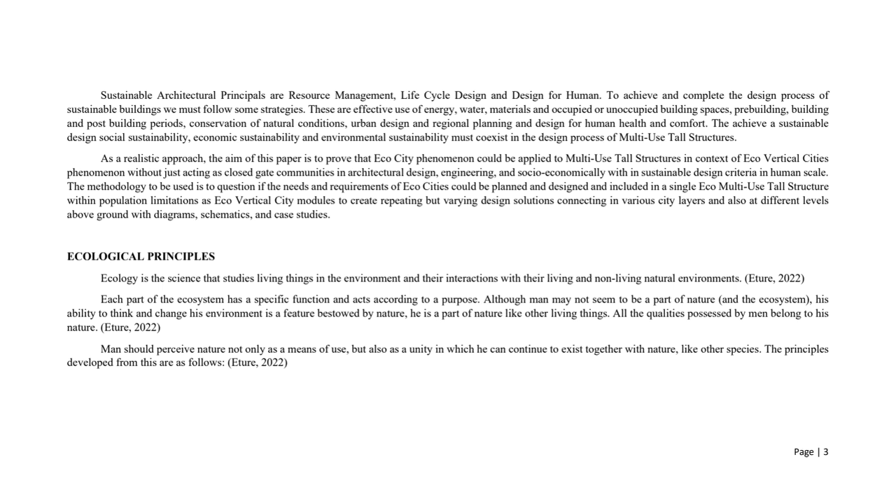Firstly, rehabilitation of the environment by making green belts in rural and urban areas and giving importance to progress in the agricultural field. Second would be adaptation to the biological environment by environmentally compatible development plans and constructions compatible with climatic conditions. The third would be balanced development, buildings with low energy consumption and preservation of existing ecological features.

The fourth would be stopping the spread over large areas by optimum use of urban areas, establishment of effective transportation networks, and limitation of urban sprawl. The fifth would be energy saving by sun, natural ventilation, and lighting or insulation, reducing energy consumption with a design suitable for climatic conditions.

The sixth would be obviously affordability. The seventh would be healthy conditions by reducing pollution and improving the environment, and recycling of waste, recycling and reusing. The eighth would be society, participation of the community in management and development.

The ninth would be ensuring social equality, equal rights for all, equal living conditions. The 10th principle should be respect for history by restoration of existing historical buildings and landmarks, and recognizing cultural diversity. The 11th would be enrichment of the cultural space. The 12th would be improvement of the biosphere.

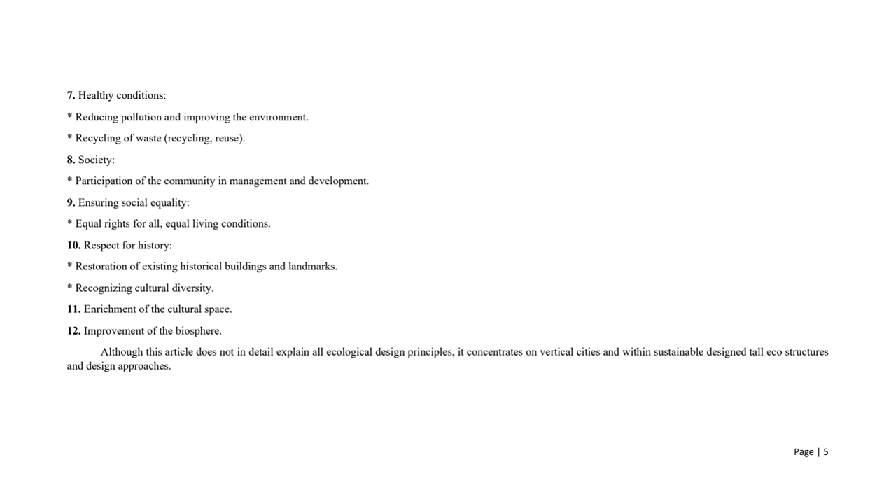When we look at vertical eco-cities and eco structures, the idea behind designing ideal cities goes back to the end of the 19th and beginning of the 20th century, due to the adverse effects of industrialization and the industrial revolution, and also increasing population and pollution. Two main studies come forward based on this idealization approach of cities: Howard's and Corbusier's. However, their approaches mostly contradict each other, although they have some common ground at some points.

The garden city phenomenon of Howard, that we can see in figures 1 and 2, was to spread the population to clusters of smaller cities of not more than 30,000 population, with agricultural and forest areas around a city-centered model in a circular orientation from center to outward. The city center would include green space belts, cultural, social, and governmental functions. The forest and agricultural areas would be the most outer cluster. Then inward, a smaller cluster of cities with residential and industrial areas, and then the main city center.

This model of ideal city planning was also based on the term of zoning of modern urban and city planning approach. The garden city model of Howard was an expansionist approach, with smaller population clusters of small cities around the city center, thus more land use, infrastructure, and transportation.

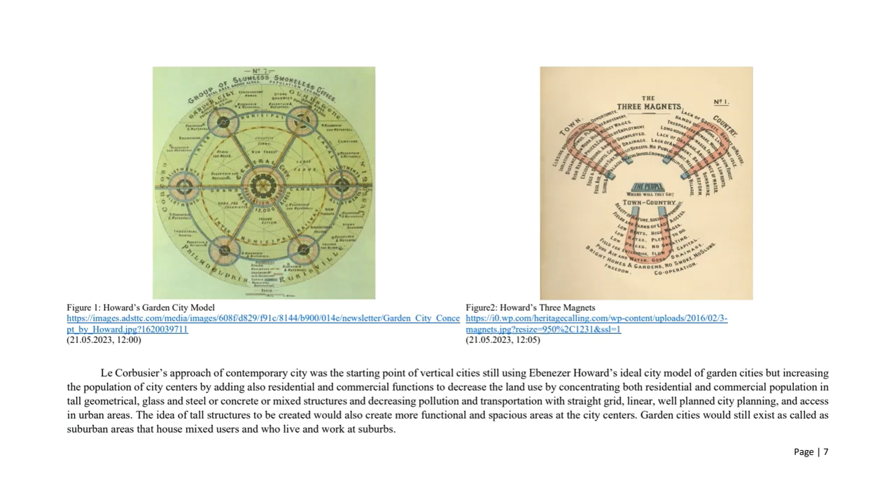The idea of those structures to be created would also create more functional and spacious areas at city centers. Garden cities would still exist, called the suburban areas that house mixed users who live and work at the suburbs. Those structures would have common amenities at the ground and some on the roof of the structures to increase sunlight access. Some examples of amenities could be kindergartens, social areas, and pools, etc. Between the blocks, more common green space and park usage would be available for all inhabitants.

With the Radiant City that we see in figure 3, which we can also call the Shining City, proposing a functional transportation network, large green spaces and living spaces with lots of sunlight, the project proposes both a new standard of living and a new, better society.

In addition, with Radiant City, 'emerged out of nothing' reflects just as in John Locke's proposition about tabula rasa, which means a blank plate. In the area designated for the construction of the project, there is nothing but the remains of destroyed vernacular European cities.

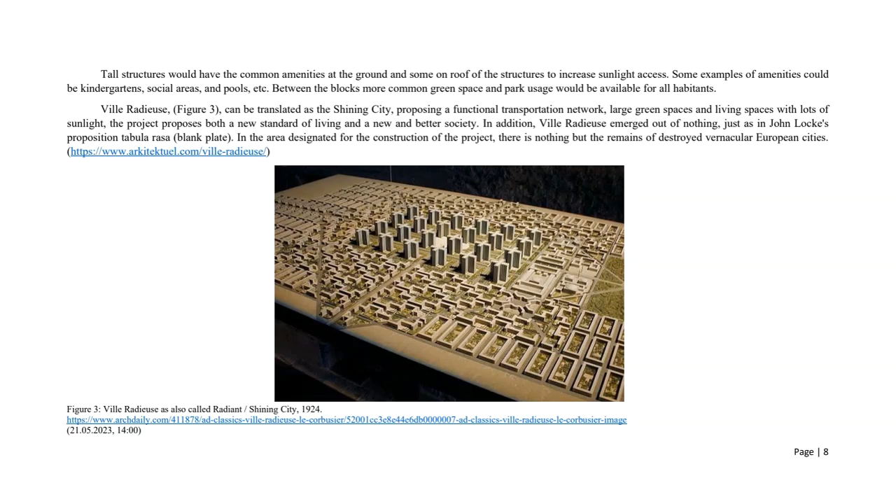Tabula rasa, blank slate, is the theory that individuals are born without built-in mental content, and therefore all knowledge comes from experience or perception. Epistemological proponents of tabula rasa disagree with the doctrine of innatism, which holds that the mind is born already in possession of certain knowledge. Proponents of tabula rasa theory also favor the nurture side of the nature versus nurture debate when it comes to aspects of one's personality, social and emotional behavior, knowledge, and sapience.

John Locke, a British philosopher, argues against the idea that everything is innate, based on his tabula rasa view. According to Locke, there is no innate knowledge, and humans acquire all their knowledge throughout their lifespan from feelings and experience.

Utopian architecture and utopian cities are highly debated even today. What was once considered a utopian approach is turning into fact today through every level of design. The existence and subjectivity of utopias make it impossible to build actual utopian cities, but adopting the idea brings it closer to reality.

Ville Radieuse is also a project that has been heavily criticized as a utopian city. Although Corbusier had thought about every important point and subject such as healthy living, traffic, sound, public space, and transportation, there were many points that Corbusier skipped, and because of this the approach was named a failure.

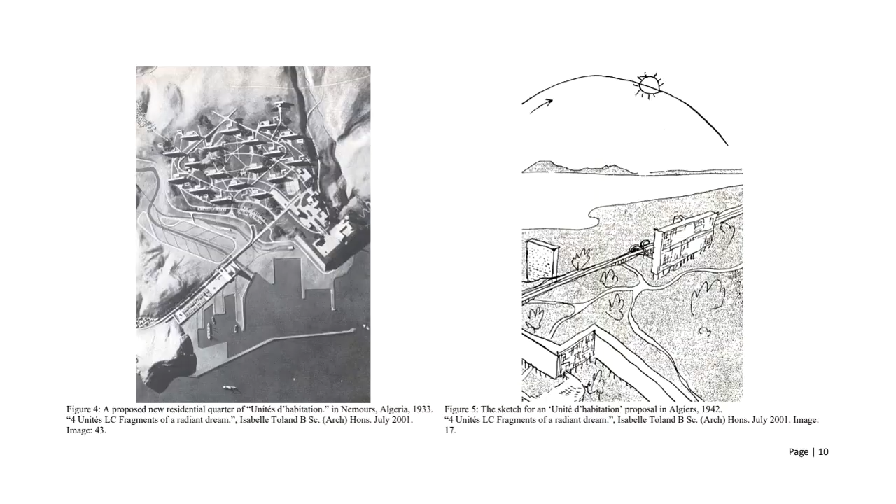Unité d'Habitation in Marseille, France, takes the form of a housing bar 135 meters long, 24 meters wide, 56 meters high, and mounted on stilts.

330 apartments divided into 23 different types can accommodate a population of between 1,500 and 1,700 occupants, having at their disposal on the 7th and 8th floors a shopping street and a hotel restaurant, together with a kindergarten and sports facilities on the roof terrace.

The constructive principle adopted, the so-called bottle rack, consists of building apartments inside an independent frame of posts and reinforced concrete beams. The apartments are made up of standard elements assembled on site.

All the apartments are dual aspect except those on the south side. A sunbreak loggia provides an open air facility while limiting exposure to sunlight.

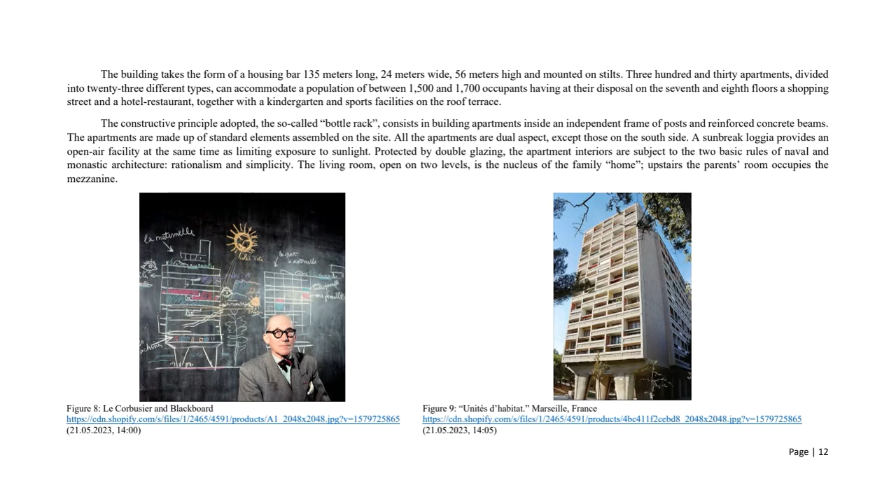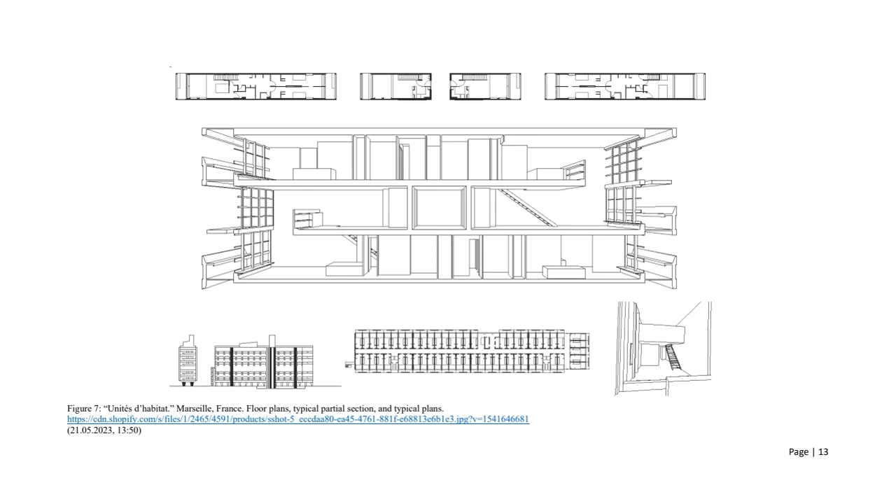In these figures, we can see the floor plans, typical partial sections, and typical plans, which were created in a modular design developed by Corbusier. All these plans were based on a 3.6 meter modular system elongated through the building, with double stories and a mezzanine.

The kitchen is equipped like a laboratory, with electrical cooker, refrigerator, rubbish chute, and storage racks. The entire apartment is fitted with racks replacing traditional storage.

The ventilation of the kitchen, bedroom, and toilets is mechanically operated, while the entire apartment is supplied with clean air by an air conditioning system.

These facilities were not found in low-cost collective housing units at that time, and the standard surface areas of Unité d'Habitation are greater than these by between 40% and 50%.

The 17 stories below the terrace are connected by 5 interior streets which, given the overlap of two-story apartments, each serve 3 floors.

Each street is accessed by a battery of 4 elevators, complemented by a service elevator, and 3 emergency stairs, which we can call fire stairs. The entire building and its equipment are designed in terms of the Modulor, the universal measuring unit conceived by Corbusier.

By the 1980s, a new approach, ecological design, emerged. It was first an idea, but as we've seen, it's a must today. So urban and regional planning must also be done ecologically.

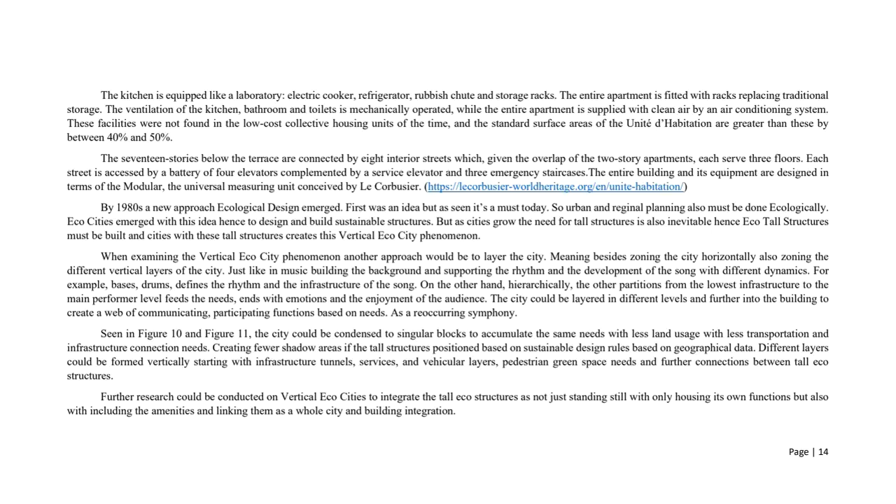In figure 10, we can see in 2A the condensation of units into single modular blocks. So if we were to compare eco-cities to a vertical eco-city, we could easily take 15 units and condense them into one tall structure.

The next one would be 2B, which is our shadow simulation. When the city spreads wide and buildings are 2, 3, 4 floors, you will have more shadow levels at the ground. But if we condense all these functions and amenities into a single building, and use the right sun direction, we can really control the shadowed areas on the site.

Also in 2C, the layering of the city can be achieved by using infrastructure at the lower levels, then service access, vehicular access, and pedestrian access. And when the buildings rise, we can interconnect them with social areas.

Also in figure 11, we can see in a larger scope that if we condense all these units into singular buildings, we would end up with more green space. Hence, with the use of layering in the city, under this green space we would have all our infrastructure and vehicular access. Besides that, we can also include other amenities like more common use areas for health, education, and cultural services in buildings or different layers.

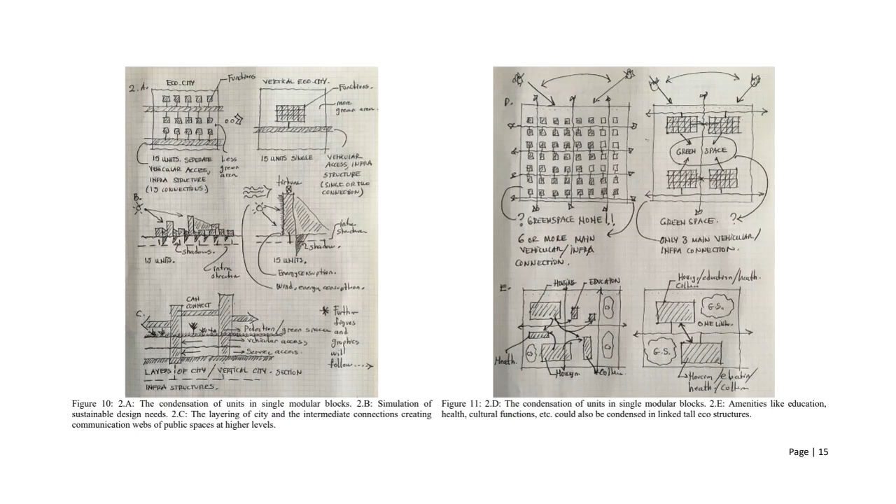We were going to look at some case studies from Norman Foster, Ken Yeang, and Moshe Safdie. First, if we start with Norman Foster.

Norman Foster, Baron Foster of Thames Bank, is a British architect and designer, closely associated with the development of high-tech architecture. Foster is recognized as a key figure in British modernist architecture. His architectural practice, Foster and Partners, first founded in 1967 as Foster Associates, is the largest in the United Kingdom and maintains offices internationally. He is the president of the Norman Foster Foundation, created to promote interdisciplinary thinking and research to help new generations of architects, designers, and urbanists anticipate the future.

At the 83rd UNECE conference, Norman Foster, founder and CEO of Foster and Partners and president of the Norman Foster Foundation, launched the San Marino Declaration.

It's a UN-approved declaration that includes principles for sustainable and inclusive urban planning and architecture to promote the broader vision of sustainable development. It obliges every city to plan urban infrastructure and buildings in accordance with the integrated principles of ecological design and sustainability. The first goal would be inclusion, diversity, and respect.

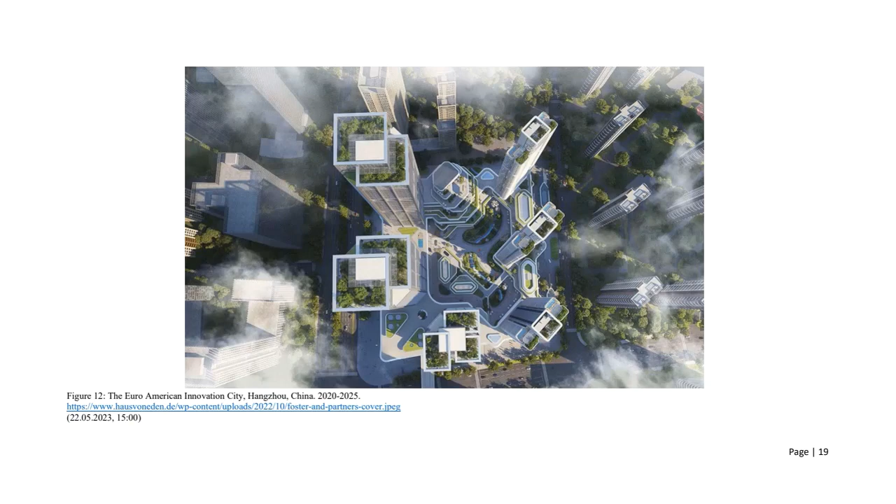One of the Foster projects we can mention is the Euro-American Innovation City, as seen in figure 12. It's still under development. This city is a vibrant, mixed-use development located at the heart of the Central Business District in Hangzhou, China. The site is part of the city's wider master plan, increasing the number of cultural, commercial, and residential buildings along a cultural landscaped axis.

The 346,450 square meter development comprises two office towers, four residential towers, a public plaza, and an IT incubator with a retail mall on the lower levels. A uniform podium connects the buildings with a ribbon of retail and public amenities. The slender towers are softened by 45-degree chamfer corners, creating view corridors into the development from the surrounding streets. The scheme is unified by a refined palette of high-quality materials, including stainless steel and GRC paneling.

The two 200-meter-high office towers are adjacent to the Qiantang River and form a striking gateway to the complex. The development is permeable with multiple layers of access across four layers, which we mentioned before as layering the city. Ground-level canopies extend outwards from the podium, indicating the various entry points to the scheme. Sheltered drop-off zones blur the lines between inside and outside, while providing direct and convenient access to the lobbies within.

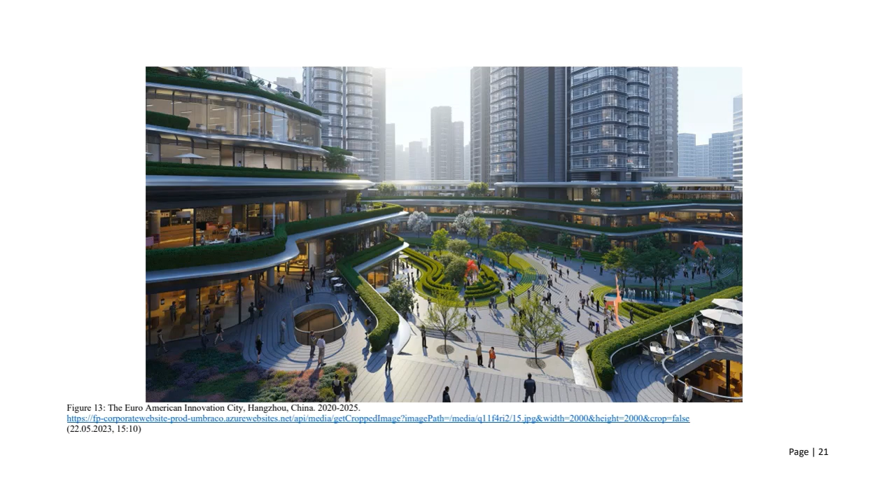In figure 13, we can see all this public space and interconnecting levels at different levels of the city. Although this is layered above the ground level, this could also incorporate below-level interconnecting spaces. And here is an overall look at the Euro-American Innovation City in Hangzhou, China.

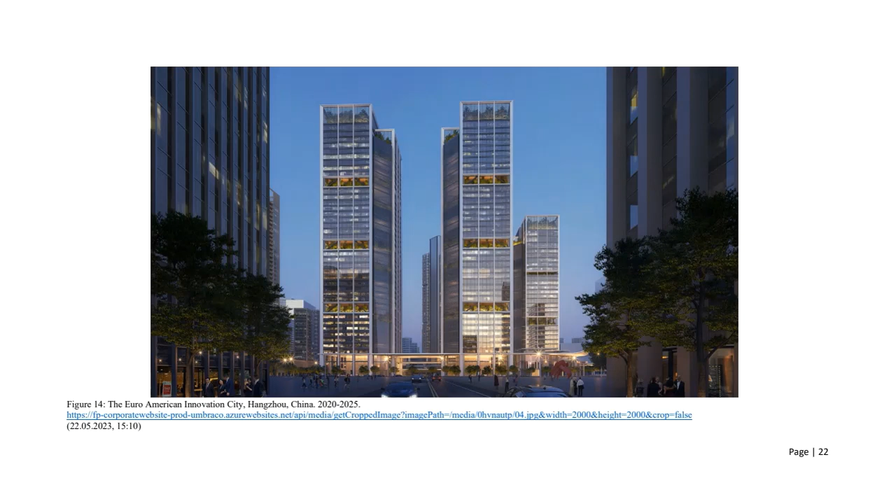One other project we can mention from Foster and Partners is the Forestias. It is still under development design scheme, started in 2016, still expected to end in 2025. It is designed for Bangkok, Thailand.

The Forestias is a residential-led master plan with a large forest at its heart, situated on the outskirts of Bangkok. It provides a template for future urban living in Thailand. The pioneering development focuses on three primary themes: serving the community, promoting intergenerational co-living, and connecting with nature. The idea of re-establishing a positive relationship with the natural world has been brought into sharp focus by the COVID-19 pandemic, as we all have lived through.

The site is divided into two zones, with the northern area containing more city-level public functions, while the larger southern portion is primarily residential. At the heart of the site, the forest defines the essence of the development, showcasing the relationship between the built and natural environments. Lush greenery surrounds the development, with planted areas offering a variety of experiences and functions within the forest. As residents and visitors travel through the site, they are surrounded by denser green spaces, offering a sense of escape into an urban oasis. The southern portion contains a number of different housing types, from high-rise to villas, catering to a varied market.

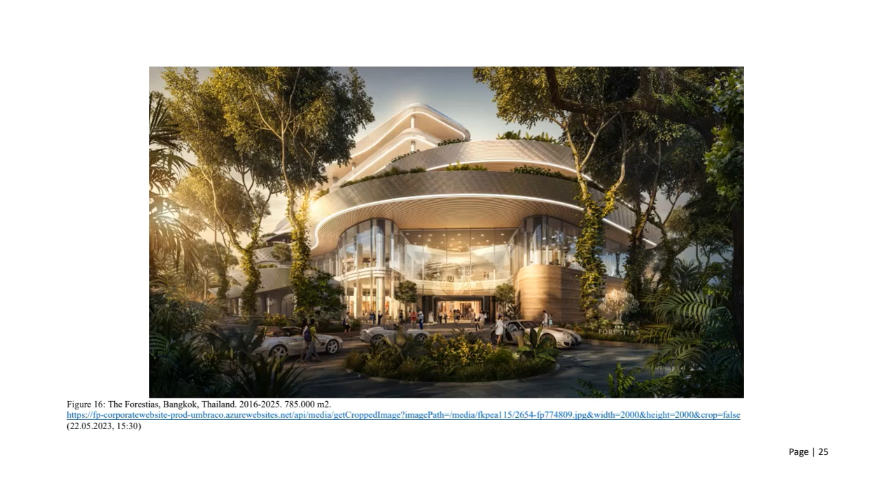Another architect we shall mention is Ken Yeang, known for his popularity in sustainable and ecological design. Ken Yeang, born on the 6th of October 1948, is an architect, ecologist, planner, and author from Malaysia, best known for his ecological architecture and eco-master plans with a distinctive green architecture. He also pioneered an ecologically based architecture since 1971, working on the theory and practice of sustainable design.

Yeang's headquarters is in Kuala Lumpur, Malaysia, as Hamzah and Yeang, but also with offices in the United Kingdom as Llewelyn Davies Ken Yeang, and in Beijing as North Hamzah Yeang Architectural Engineering Company.

Rising over global cities, the modern skyscraper has long been a symbol of economic growth and environmental decline. For years they have been reviled by environmentalists for being uncontrolled energy consumers. Malaysian architect Kenneth Yeang acknowledged the skyscraper as a necessity in modern cities and adopted a pragmatic approach to greening the otherwise unsustainable building typology.

Yeang's bioclimatic skyscrapers blend the economy of space and sustainability and improve living standards. A champion of sustainable architecture in Southeast Asia, Kenneth Yeang's work is driven by an ecology-based approach. He was a student of the Scottish landscape architect Ian McHarg, who encouraged Yeang to design according to a regional microclimate. Best known for his green architecture and master plans, Yeang's designs display a distinctive green aesthetic that performs beyond conventional rating systems. With many successful projects in his portfolio, Yeang became well known for reimagining skyscraper design in fast-growing Southeast Asia.

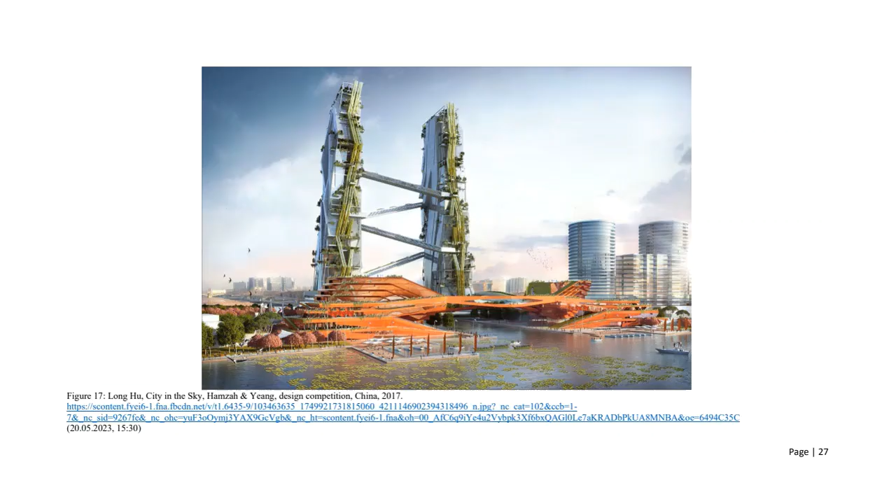One of the design competition projects from Hamzah and Yeang that we are going to look into is the Long Hu City project.

The City in the Sky project transforms conventional concepts of urban design into high-rise building form as vertical urban design, which we also call vertical eco-cities. In concept, we are also talking about multi-use eco-tall structures.

From this, an understated urban typology is infused into the traditional planning of Chinese cities, catalyzing the emergence of an ambitious and innovative city.

The architectural significance of the City in the Sky is its ability to effectively reduce the density of buildings and population on ground level, which is now able to be conserved for greening purposes.

The master plan layout is primarily developed based on principles that prioritize ecological connectivity and super green development, in order to maximize the ratio of natural ecology to the overall landmass of the Long Hu Financial Center.

A series of ecological corridors is proposed as interlinked channels, establishing a green network, thereby bringing a comfortable and pleasurable space for the public. It will likewise serve as a vast wetland park with various bird species that will visit and improve the local ecological diversity.

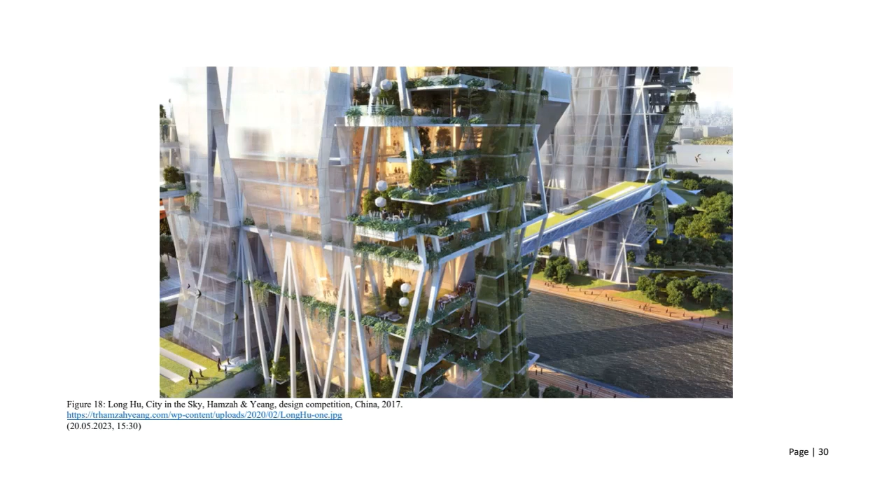Here we can see all these interconnecting levels with social activities between buildings. Greenscape is also active in the building, with routes created as walkways. We can see the continuity of landscape at the ground level throughout the building, with amenities also included at ground level and in the sky towers.

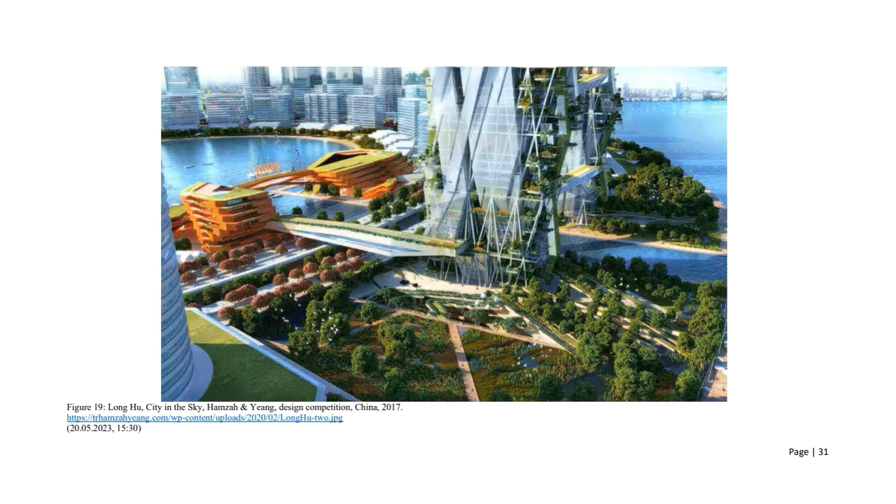Another architect we shall mention regarding sustainability, ecological design, and vertical eco-cities interconnected in the city is Moshe Safdie. Born July 14, 1938, he is an architect, urban planner, educator, theorist, and author with American, Canadian, and Israeli citizenship. He is known for incorporating principles of socially responsible design in his 50-year career. His projects include cultural, educational, and civic institutions, neighborhoods, public parks, housing, mixed-use urban centers, airports, and master plans for existing communities and entirely new cities in North and South America, the Middle East, and Asia.

Habitat 67 was the major theme exhibition of the 1967 Montreal World Exposition. As a landmark demonstration project, it pioneered a vision for urban housing using prefabricated construction technology, a breakthrough building type that continues to resonate today. Habitat seeks to create a vital neighborhood with open spaces, garden terraces, and many other amenities typically reserved for the single-family home, now adapted to a high-density city environment.

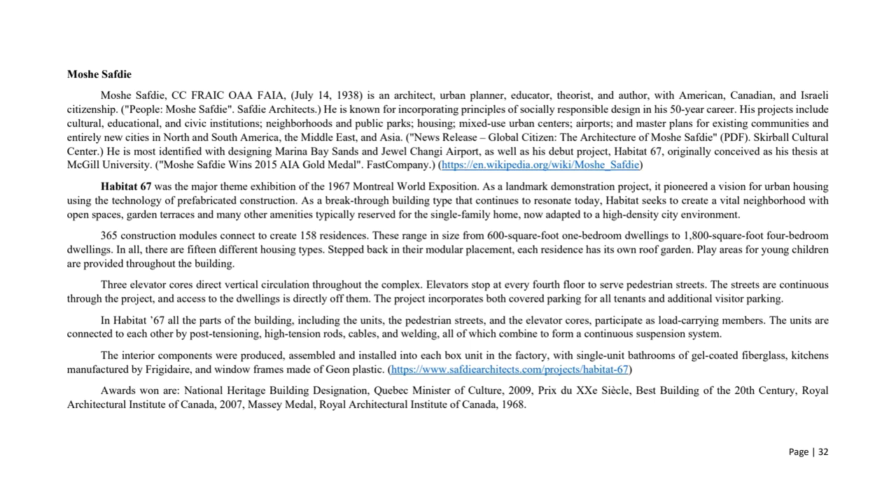In Habitat 67, we can also trace this design back to Corbusier's Unite d'Habitation settlement, where the main idea was a naval and monastic approach, applying two basic rules: rationalism and simplicity. In this project we can also see this rationalism and simplicity—repeating units stacked on top of each other with open corridors, which is also a sustainable and ecological design approach, with terraces and green spaces on top.

This project could be improved much further, but the horizontal settlement of the project, which we can see in the next figure, made it perhaps a more brutal approach in city design.

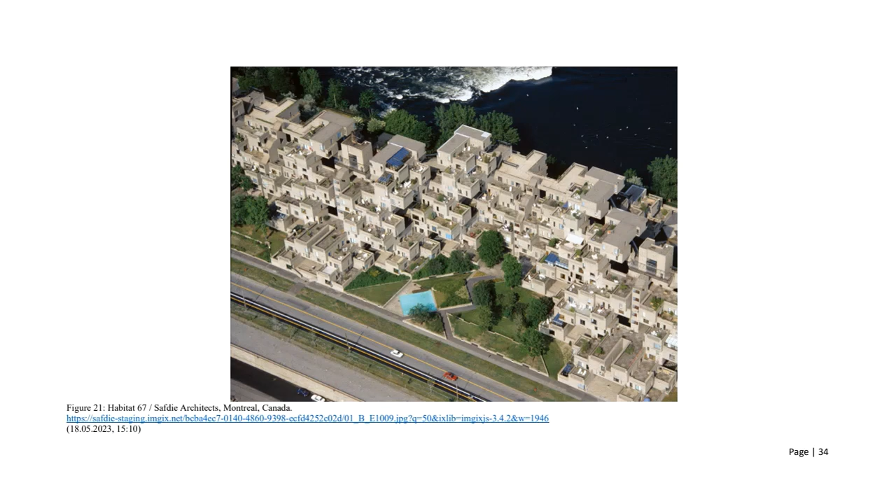But further, this approach might be taken into consideration if, instead of horizontally spreading cities, we could create a naval and monastic approach with modular units in multi-use eco-tall structures, interconnected at different levels, also below ground, as city layers with infrastructure, then service levels, then vehicular levels, then pedestrian levels, then interconnecting multi-use eco-tall structures.

Maybe, as in Habitat 67 by Moshe Safdie, the stacking layers of prefabricated units as neighborhoods could be repeated in a multi-use eco-tall structure, as seen in these sections.

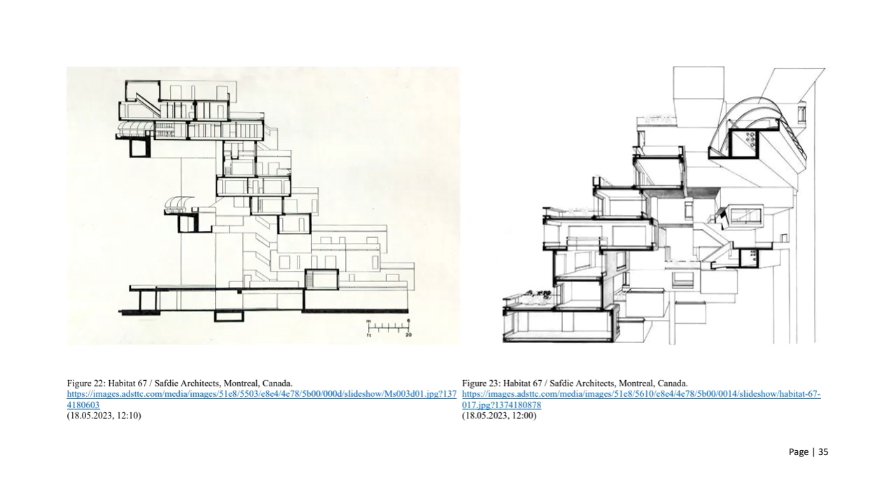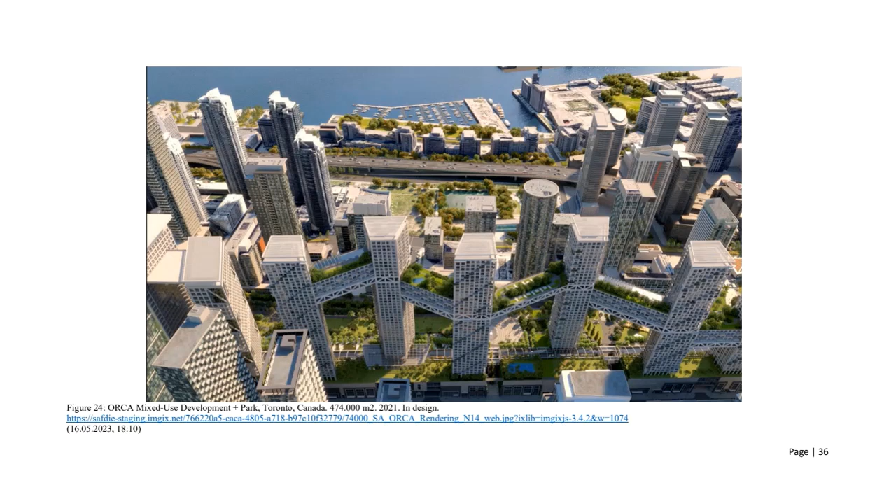The next project we are going to talk about is again Moshe Safdie's work, stacking these units—the Orca mixed-use development and park in Toronto, Canada, still in the design process. The Orca project reclaims a vast urban site in downtown Toronto by decking over a major rail corridor. Residential, office, hotel, and retail are designed around a new 11-acre park, the heart of the neighborhood. The ambitious integration of private development and a major publicly accessible park creates a vibrant park-oriented community for Toronto.

Toronto Orca decks across the 100-meter wide active rail corridor, which previously split the city. By tucking vehicular access and parking within the decking structure, 65% of the site area is left as publicly accessible open space, exclusively for pedestrians and bicyclists. The diverse programmed park provides a major amenity for the surrounding community.

The project includes 8 residential towers with approximately 3,000 units of housing, a 900,000 square foot commercial office tower, and 450,000 square feet of retail space opening directly onto the park. The interconnected towers are positioned to preserve sunlight on the park and encourage interconnected access to and from the surrounding neighborhoods.

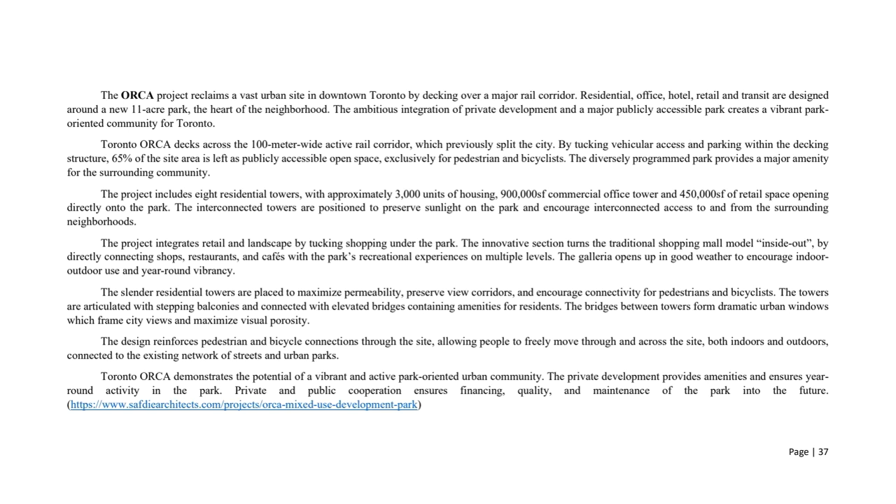The slender residential towers are placed to maximize permeability, preserve view corridors, and encourage connectivity for pedestrians and bicyclists. The towers are articulated with stepping balconies and connected with elevated bridges containing amenities for residents. The bridges between towers form dramatic urban windows which frame city views and maximize visual porosity. The design reinforces pedestrian and bicycle connections throughout the site, allowing people to freely move through and across the site, both indoors and outdoors, connected to the existing network of streets and urban parks.

Toronto Orca demonstrates the potential of a vibrant and active park-oriented urban community. The private development provides amenities and ensures year-round activity in the park. Private and public cooperation ensures financing, quality, and maintenance of the park into the future.

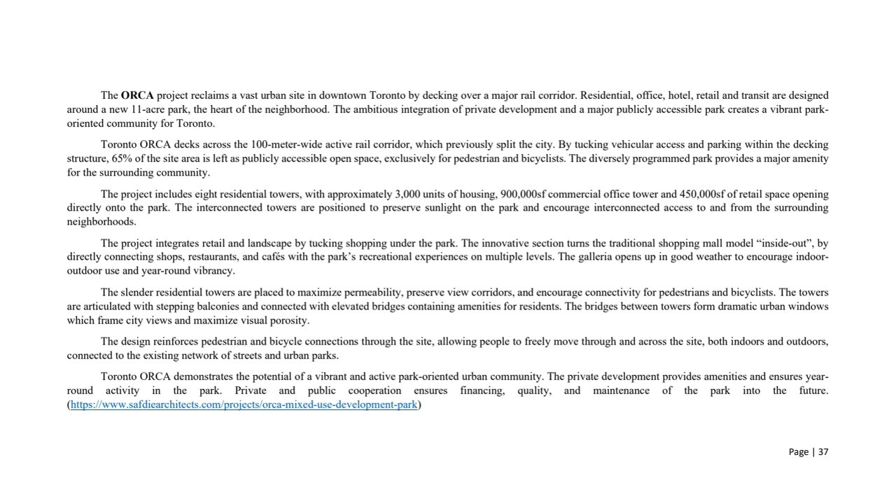Here in Orca Mixed-Use Development and Park in Toronto, Canada, we can see all this layering, looking at the infrastructure, all these street levels, also the vehicular access and the pedestrian levels.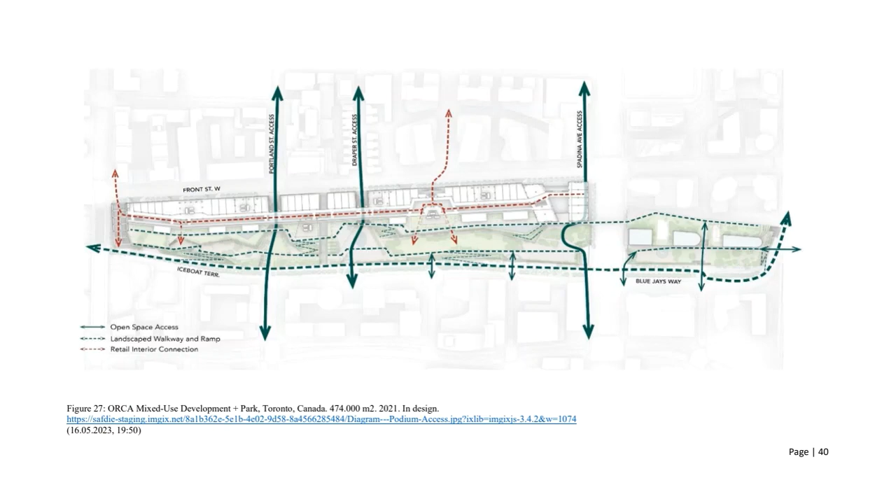Here are some more renderings about the project because it's still in design when we look at it. Although it looks as a brutal approach, city design as the subject of vertical eco-cities and also multi-use eco-tall structures, it might look as a plausible approach for design, which could be further investigated and developed.

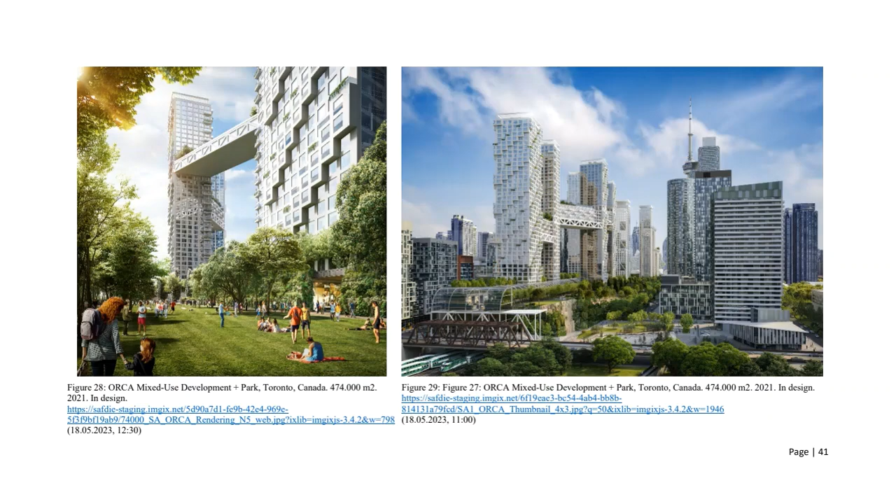As we come up with the conclusion and implications for further research, during the design, construction, and lifespan of multi-use eco-tall structures, design and regional planning of eco-vertical cities must be taken into consideration, since the multi-use eco-tall structures have to exist in populated cities. Vertical eco-cities could be a solution for less infrastructure, less carbon emission due to less transportation, and less heat effect, more public and green space at street level, etc. But there are both positive and negative effects of multi-use tall structures on the environment and social structure.

At the beginning of the design process of a multi-use tall structure, the area that the building will be built, the climate, prevailing wind directions, its geological location, its surroundings, the planned height of the building and number of floors, size of the floor areas based on the function or functions of the building, weight of the building, the required systems of ventilation and lighting again based on the functions, the structural system materials required to be used during construction, construction systems, and lastly, climate should be taken into consideration within the scope of sustainable design criteria.